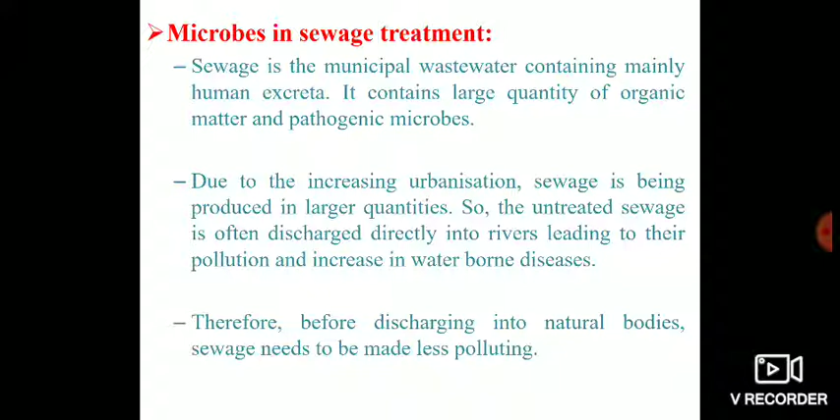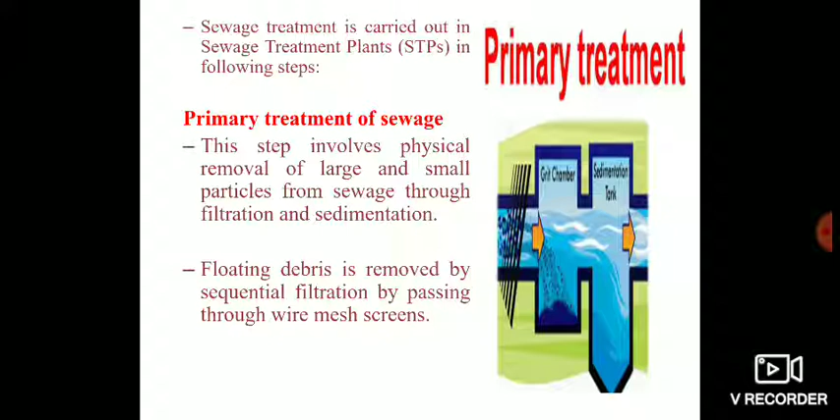Therefore, it is quite essential to treat the sewage before it is thrown into the water bodies so as to make it less polluting. Sewage treatment is carried out in sewage treatment plants in the following three steps. The first step is known as primary treatment of sewage. This step involves physical removal of large and small particles from sewage through filtration and sedimentation.

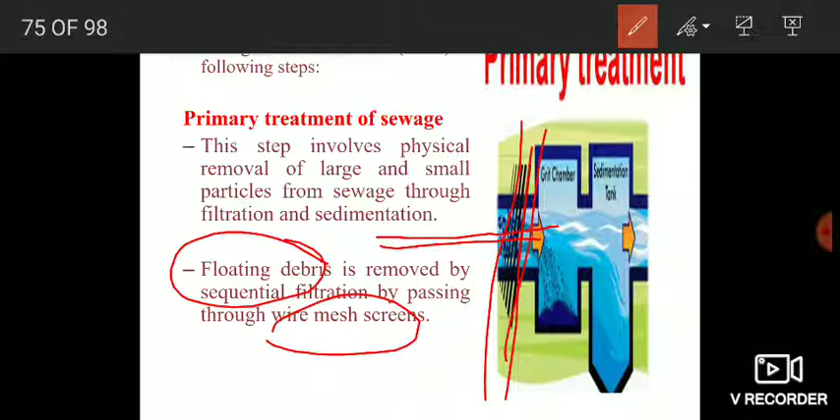First of all, filtration. The floating debris that is present in sewage is removed by sequential filtration by passing through wire mesh screens. Here you can see this is the wire mesh screen. You are allowing the wastewater to move through this wire mesh screen. The floating debris that is present in sewage water gets collected here.

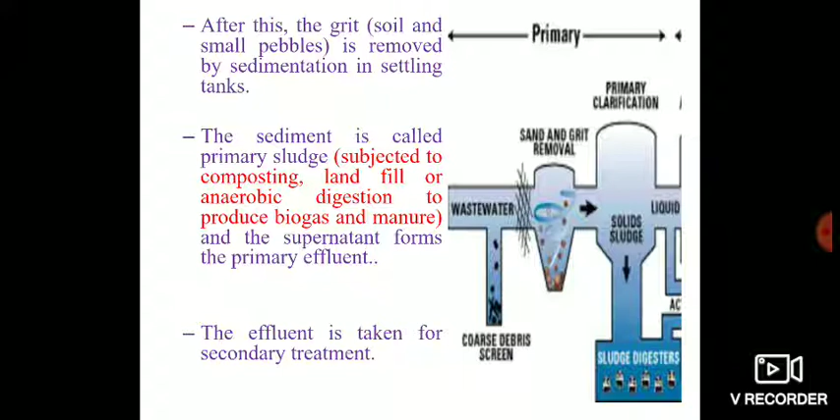And after this, the grit, which is composed of soil and small pebbles, is removed by sedimentation in a settling tank. The water that moves through this wire mesh is allowed to move into this tank, and in this tank, the grit gets collected here. Then this water is allowed to move into another settling tank. In this settling tank, the solids start sedimenting and form the sludge, which is known as primary sludge.

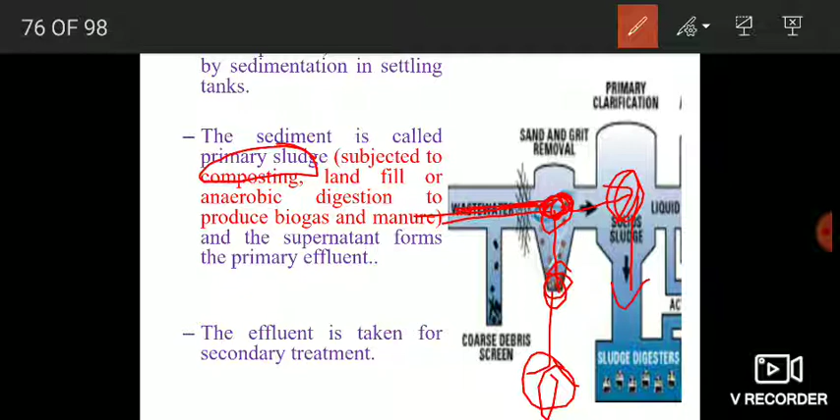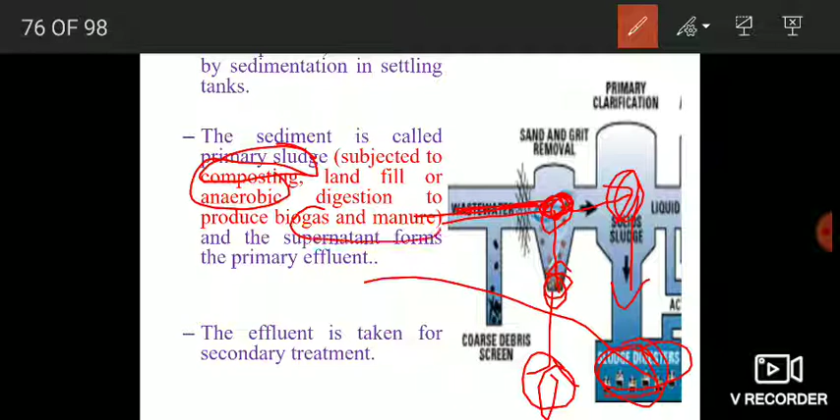This primary sludge can be subjected to composting, or it can be used for landfill purposes, or in some cases you can allow anaerobic microorganisms to grow in this primary sludge and produce biogas and manure. The supernatant that you get in this primary treatment forms the primary effluent, and this primary effluent is then taken for secondary treatment.

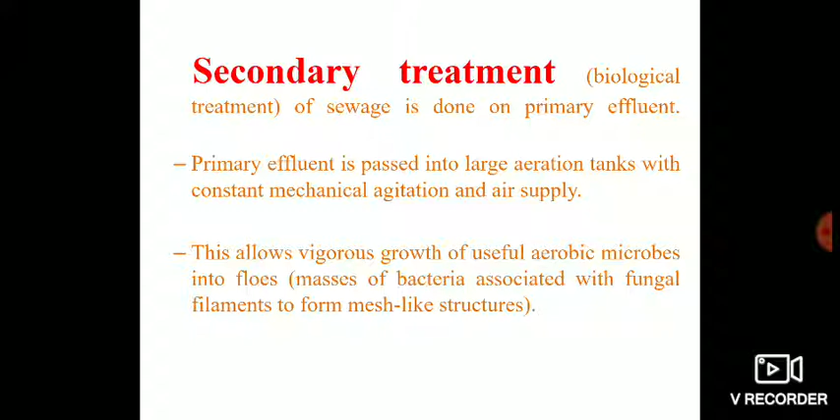Now, what is secondary treatment? Secondary treatment is also known as biological treatment of sewage, because this treatment is primarily done with the help of microbes. In the secondary treatment, the primary effluent is passed into large aeration tanks with constant mechanical agitation and air supply. This agitation allows a large amount of air to go into the tank, which allows vigorous growth of useful microbes, and these microbes form the flocs.

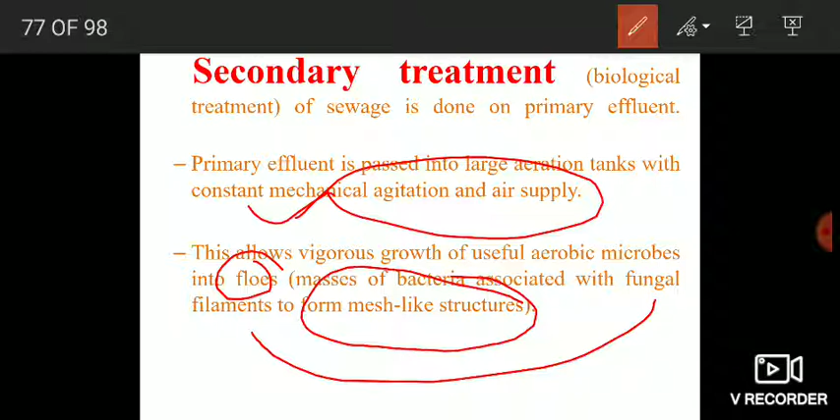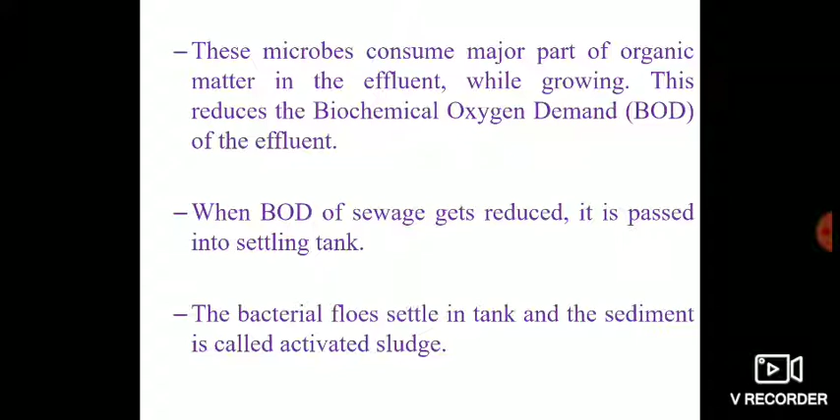Flocs are actually masses of bacteria associated with fungal filaments, and they can be seen as mesh-like structures on the surface of water. Due to the formation of these flocs, the microbes present in huge number consume a major part of organic matter in the primary effluent, and this reduces the BOD as well. When organic matter content decreases, this also reduces the BOD of the water.

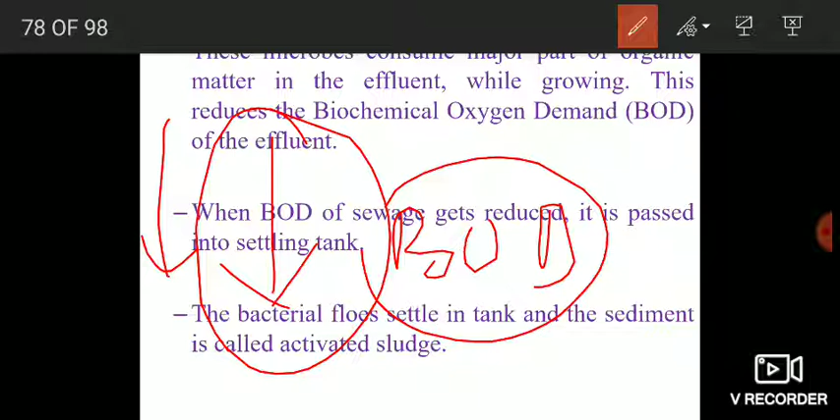What is BOD? BOD simply means how much oxygen is needed to oxidize the organic matter content of water. Since the organic matter content has got reduced due to microbes, so has the BOD. This decrease in BOD is a sign that the water is now not containing that much organic matter pollutant.

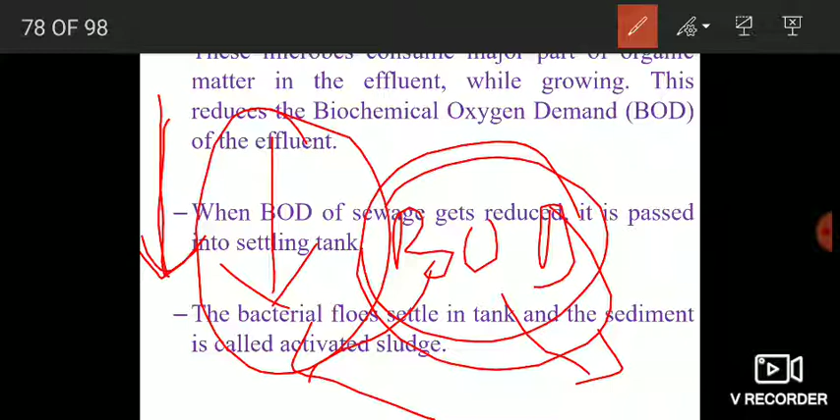When BOD of sewage gets reduced, it is passed into a settling tank, and in the settling tank, the bacterial flocs settle down and form the activated sludge. A small amount of this activated sludge is pumped back into the aeration tank to serve as inoculum, and the remaining major part of the sludge is pumped into large tanks called anaerobic sludge digesters.

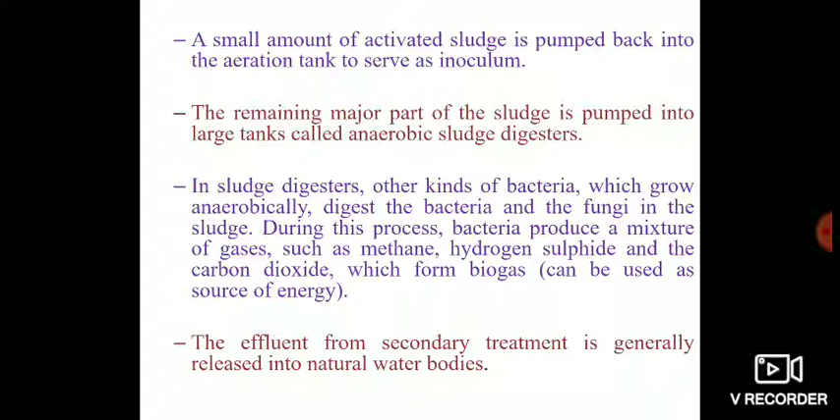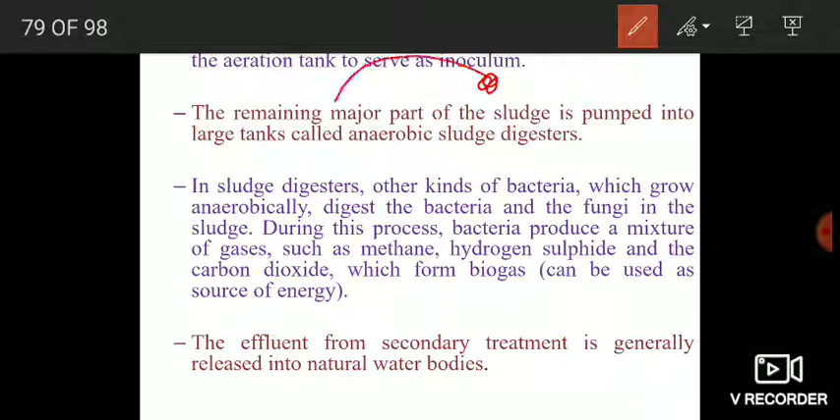जो आपके पास activated sludge होता है, a small amount of activated sludge is pumped back into the aeration tank, and a large amount of this activated sludge is pumped into anaerobic sludge digesters. Inside anaerobic sludge digesters, other kinds of bacteria which grow anaerobically digest the bacteria and the fungi in the sludge, and during this process a mixture of gases such as methane, hydrogen sulfide, and carbon dioxide are released, which form the biogas, and this biogas is used as a source of energy.

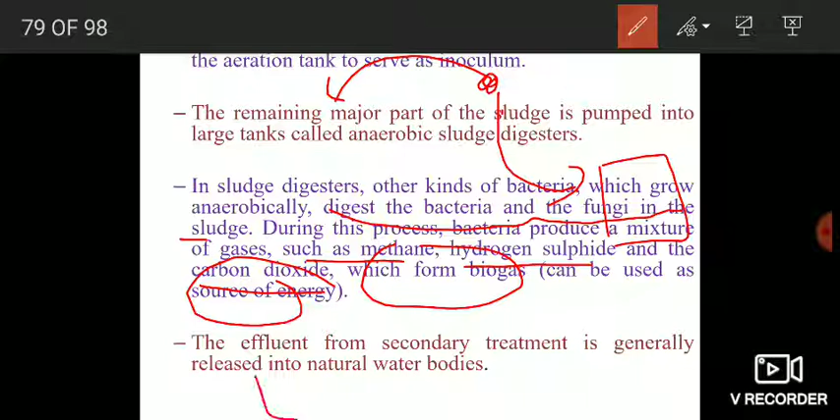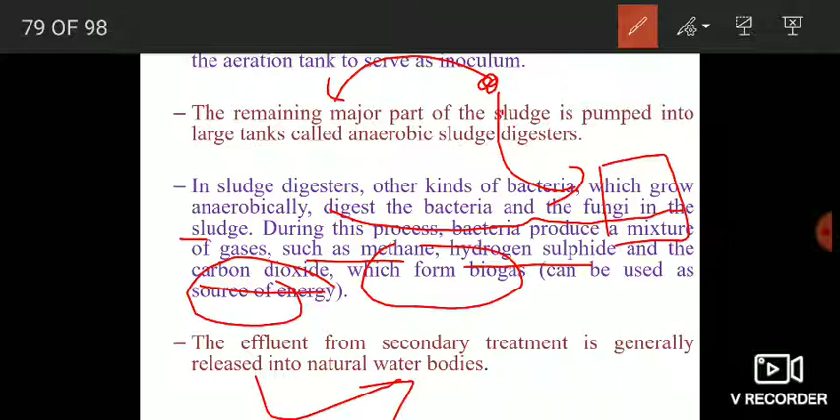The effluent that we get from the secondary treatment is generally thrown into the water bodies in the majority of cases. But in some instances the effluent is further treated in tertiary treatment, that we are going to discuss here. Let's first see how secondary treatment is being performed.

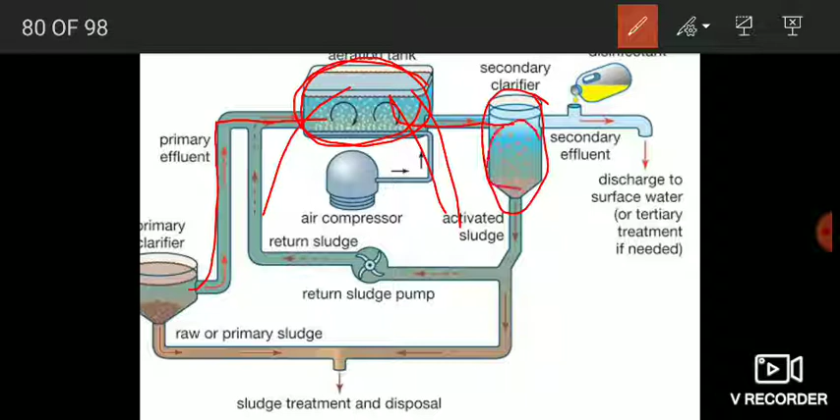Here we have this primary effluent, and this effluent is allowed to move into this large aeration tank where bacteria grow, they form flocs and reduce the organic matter content and BOD of this wastewater. This wastewater is then allowed to move into this settling tank, and inside the settling tank the bacterial flocs settle down and form the activated sludge. A small amount of this activated sludge is pumped with the help of this pump back into the aeration tank so that the bacteria can be continuously present.

They will continuously grow in this aeration tank, and a large fraction of this activated sludge is taken out and put in anaerobic digesters where the biogas is produced with the help of anaerobic microorganisms. The effluent that you get here, which is known as secondary effluent, is generally released directly into the water bodies, but in a few instances the secondary effluent needs to be further treated. This is done with the help of tertiary treatment. It is the final treatment. So now we will discuss tertiary treatment.

Tertiary treatment is a final treatment to raise the effluent quality before it is discharged into water bodies. In some cases the effluent contains high levels of nutrients, like nitrogen and phosphorus, and in order to prevent eutrophication of water bodies, these nutrients need to be removed. Different methods are employed to remove the nitrogen and the phosphorus from the secondary effluent. Nitrogen is removed by nitrification and denitrification.

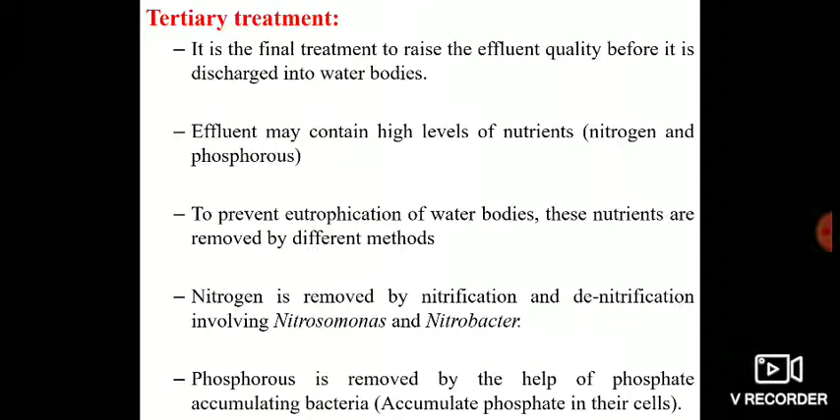The ammonia that is present in wastewater is allowed to undergo nitrification, and it forms nitrate. Then the nitrate is allowed to undergo denitrification, and during denitrification nitrate gets converted to N2O and N2, and this moves into the air. This process of nitrification is carried out with the help of Nitrosomonas and Nitrobacter. Simply, the nitrogenous compounds present in the secondary effluent need to be removed, and this is done with the help of Nitrosomonas and Nitrobacter.

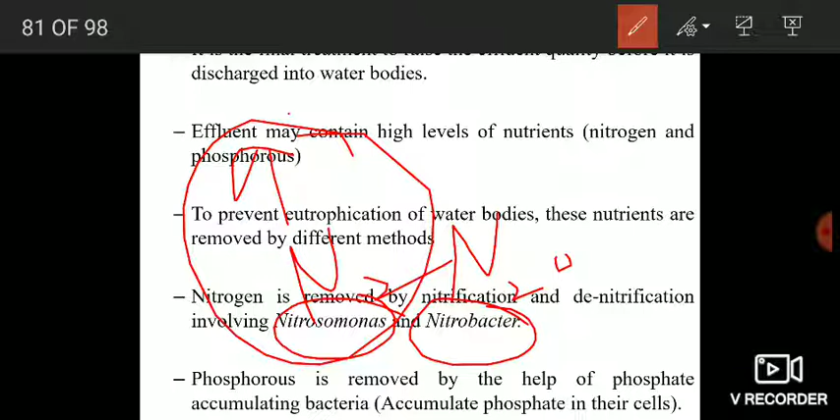The phosphorus present in the secondary effluent is also removed with the help of phosphate accumulating bacteria. These phosphate accumulating bacteria accumulate phosphate in their cells. Now when both the nitrogen and the phosphorus have been removed from the secondary effluent, the effluent is finally disinfected for later use for drinking, bathing, irrigation, etc. जब आपने nitrogen भी निकाला and you have also removed the phosphorus, this secondary effluent is finally disinfected so that it can be used for drinking, bathing, irrigation, etc.

The disinfection is commonly done with the help of ozone, which is an oxidizing agent, chlorine, UV light, and sodium hypochlorite. So when the secondary effluent has been finally disinfected, it is then discharged into the water bodies, and you can use this water for drinking, bathing, or irrigation, whatever you like. This is all about sewage treatment.